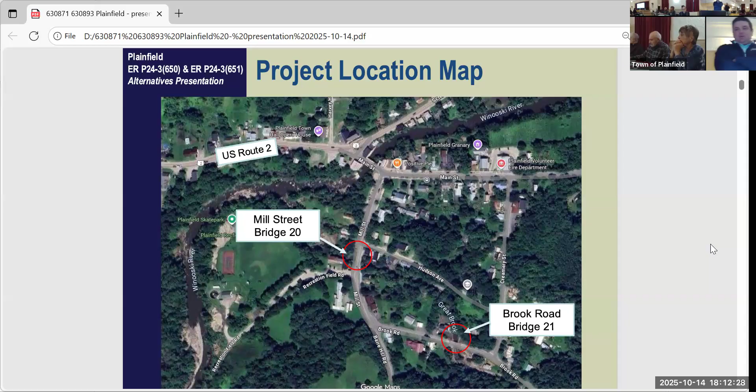Can you advance to the next slide? Again, just a project overview of the two sites. The top one is Mill Street Bridge 20, with a temporary truss bridge on stub abutments. The bottom photo shows Brook Road Bridge 21, built circa the 1920s.

Brian, just a quickie, are you not talking about the washout just a little bit up past Bridge 21 tonight? Are you talking to Cameron? Just the bridges? Okay, just the two bridges. Okay, I thought this was going to be three parts, so, okay, thank you.

Because of the use of federal monies for this project, we need to follow the VTrans Municipal Assistance Bureau flowchart. What I've provided is a general list of steps we're currently at. We're at the public meeting stage. At the conclusion of this meeting, we're hoping the town can select a superstructure, a substructure, and a traffic control methodology to advance to preliminary plans in NEPA. Following that would be potential right-of-way acquisition, permitting, then final plans, contract plans, bid phase, and construction.

Next slide, please. Some of the site challenges for both projects are the overhead utilities. They are located adjacent to both bridges, so demolition and construction will be problematic. More than likely, a temporary or permanent relocation will be required for those utilities. Also, in the village setting, we've assumed a right-of-way of 3 rods. One rod is 16.5 feet, so 3 rods is 49.5 feet. We're thinking it's more than likely you'll need some type of permanent or temporary easements if the adjacent parcels aren't owned by the town through the FEMA buyout process.

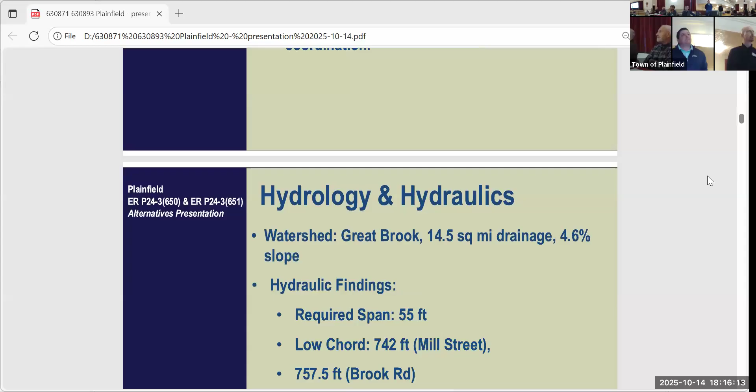Could you move to the next slide? So, hydrology and hydraulics, our D&K subconsultant, Elena Smith with Hydrus Engineering, performed this task for us. One of the first steps is determining the design storm event. For the bridge opening area, she chose a Q50, or a 2% annual exceedance probability, for the design storm event, based on the V-Trans hydraulics manual. Brook Road and Mill Street are both classified as major collectors, so based on the table, you're supposed to be designing to a Q50 storm event.

For the hydrology component, she was trying to determine how much peak flow would be going beneath both bridges. She looked at regional regression equations, coordinated with state permitting and state agencies, and also looked at stream gauge data.

Her recommendation, based on an 80% confidence level, was a flow rate of approximately 2,800 CFS through both bridges.

Once that was known, moving to hydraulics, she tried finding the required waterway opening. She is recommending a clear span of 55 feet, and based on the storm event, provided low chord elevations. Low chord being the bottom of the bridge on the underside.

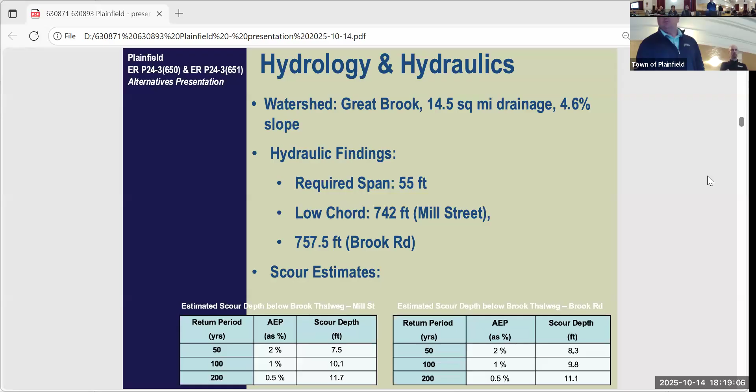Okay, so put that into perspective. If scour wasn't analyzed, a V-Trans recommendation with a hydraulics report might say putting the bottom of your structure 6 feet below the stream bed. So much deeper than a general V-Trans recommendation. And that's just where the supports are going, right? Yes.

Geotechnical. This past summer, another one of our subconsultants, GZA Geoenvironmental, conducted subsurface investigations, borings - 2 on Mill Street, 1 on Brook Road - and they were able to use boring information from a previous design consultant, limiting the amount of borings required for Brook Road.

They found that the soils consisted of fills, sand, silt, clays, some sand and gravel deposits, and for the Mill Street project, probable bedrock was 80 feet below ground surface, and for Brook Road, just slightly less than 100 feet. Their conclusions were that spread footings are suitable to bear on these soils. However, they acknowledged the scour potential for both these bridges, and mentioned that pile foundations would also be suitable.

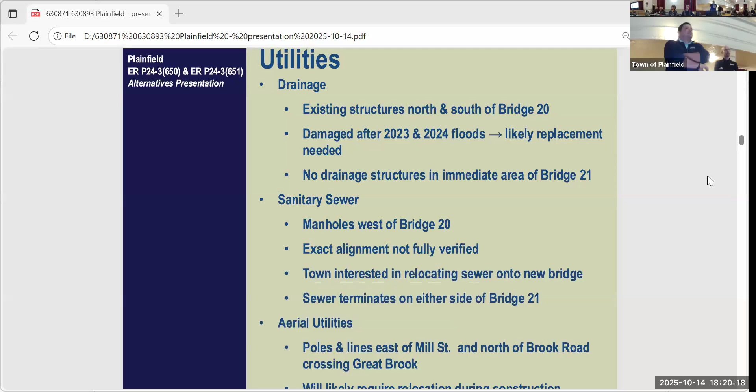Utilities. I've already mentioned aerial utilities. In general, the Brook Road Bridge has less utilities than Mill Street, so there's less coordination or impacts. On the Brook Road Bridge, besides aerial lines, I'm only aware of a water line that got damaged during the July 2024 storm event, and it's capped. For Mill Street, there are sanitary sewer, drainage, and a water line in that area that may be affected.

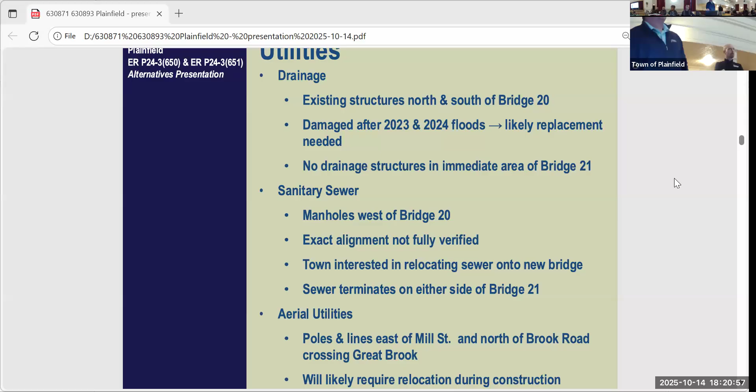This is just a regurgitation of what I said earlier about the 3-rod right-of-way and the need for potential permanent and temporary easements. Could you move on to the next slide?

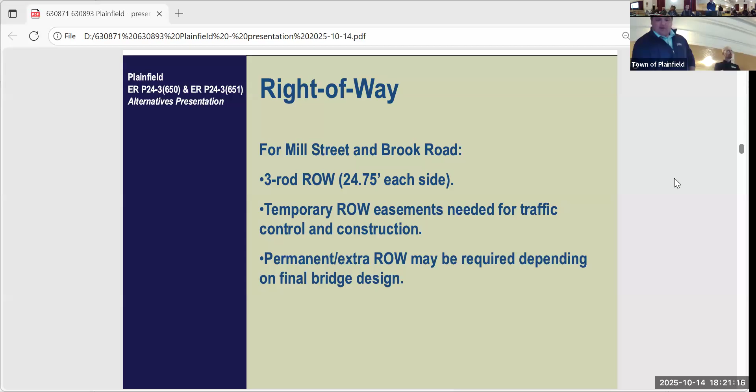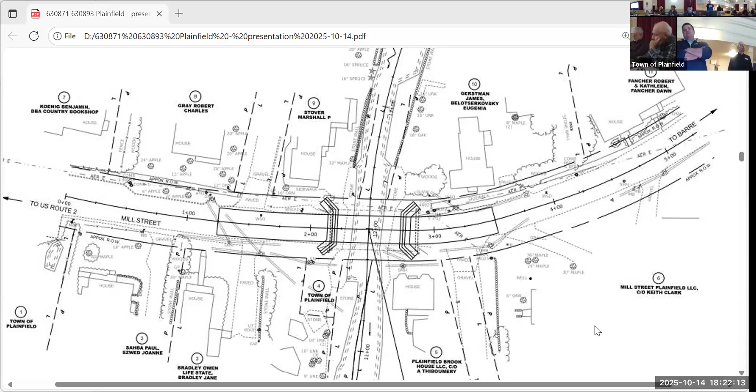Could you move to the next slide, Brook Road right-of-way plan? Again, this is showing generally the same information, with the need for potential right-of-way in the area.

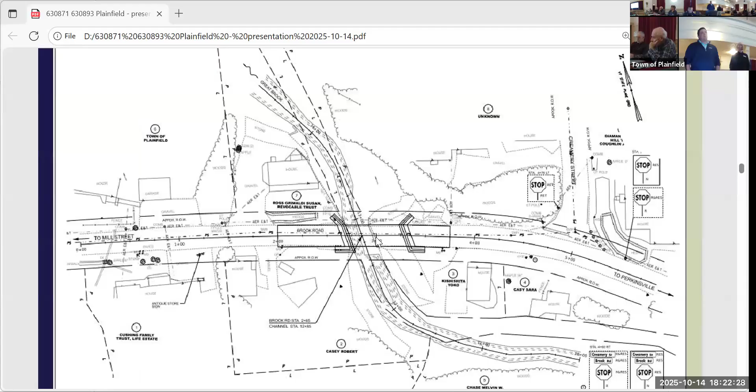Moving on to environmental resources. Because of federal monies used on this project, NEPA documentation is required - National Environmental Policy Act. It's a US law that requires federal agencies to evaluate environmental impacts whenever a federal proposed action is being implemented. For permits, we're anticipating a US Army Corps general permit, and the other one associated with a bridge is a stream alteration permit.

Also, as part of this environmental task, D&K staff visited the site this summer to identify natural resources. The conclusion was that there was no significant species - rare, threatened, or endangered species - within the project site, which is a good thing. They did document invasive species, things like Japanese knotweed, in the area.

So this is a layout plan. As the design progresses, we'll be developing more detail. For this, I just wanted to point out we're showing a 55-foot clear span on the bridge, pointing out proposed wing walls and potential roadway reconstruction limits.

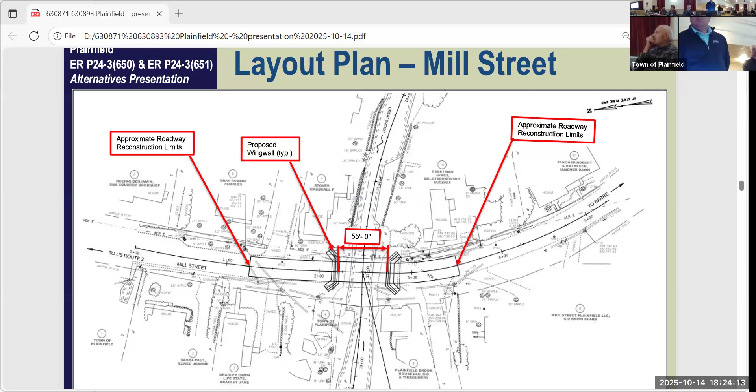Does that include the rising of the road, as you said? Yeah, if we move on to the next slide. This is a profile view of Mill Street, showing the approximate 2 to 3 foot rise in the bridge. We're currently showing shallow roadway approach slopes of 1%, 2%. I just want to mention, depending on how the project develops, if the town or property owner feels impacts to their property are too great, one option is to potentially steepen the roadway approach grades while still keeping acceptable grading. But for right now, we're just showing 1%, 2% grades, shallow, to kind of mimic what's out there currently.

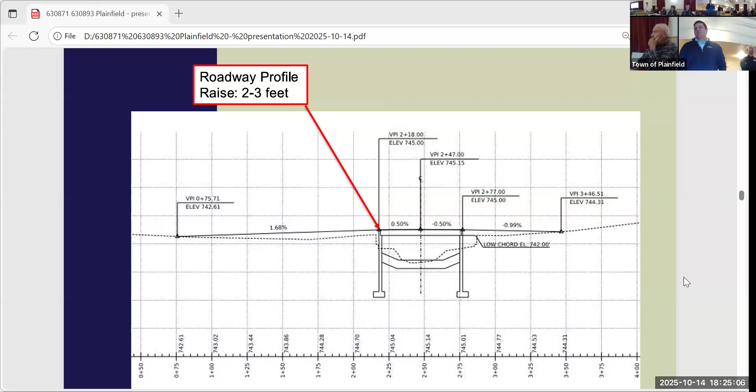Moving on to Brook Road, it's the same information I presented for Mill Street, 55-foot clear span. The one thing I might mention for this one is we are currently proposing, or thinking about, for the western abutment, keeping it in its existing location and expanding to the east. Because the western abutment ties in well with the existing rock armoring and existing concrete wall downstream. But again, as we develop, we will refine that.

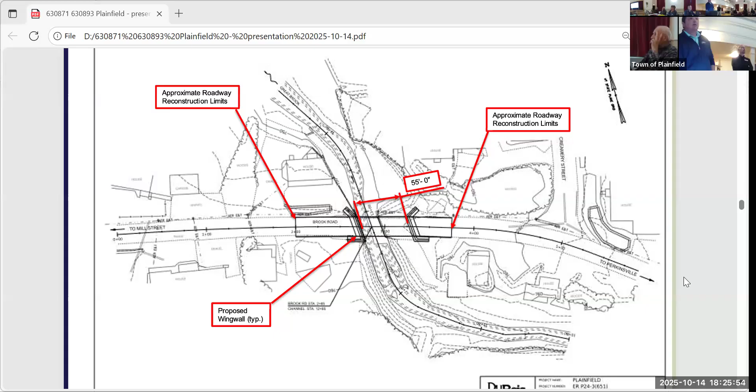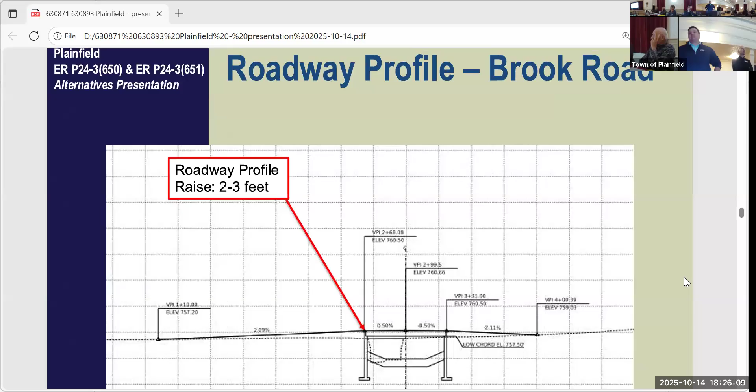Again, there's the 2 to 3 foot rise in the profile. We are currently showing tangential kink points in the roadway profile. As we progress to preliminary plans, we'll be putting in vertical curves and refining the profile. But again, we're showing a 2% downward, upward and downward approach on the roadway here, which could get steepened to 3% or 4% to limit impacts.

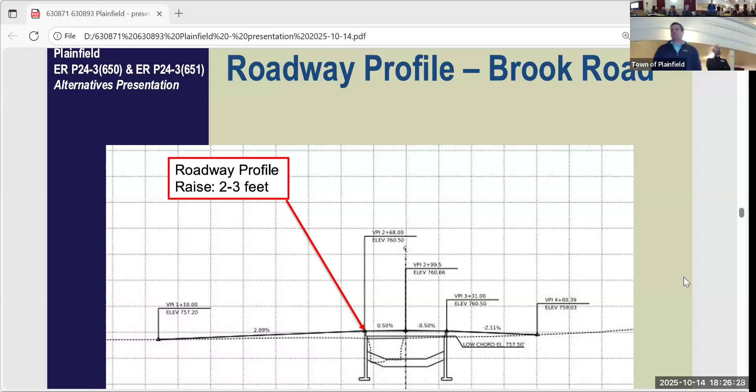So we've identified 3 areas, or 3 traffic control schemes, in which both these bridge projects could get constructed. One of them will be a permanent roadway and bridge realignment upstream or downstream of the existing bridge. Key advantages to this would be minimal disruption to existing traffic and building everything offline. Key disadvantages: I don't feel like it meets the village character to have S maneuvers in the roadway, and there would be major right-of-way acquisition for that.

A second traffic control scheme we considered was a temporary road and bridge upstream or downstream, with reconstruction of the existing bridge alignments. A major key advantage is that it allows for on-alignment construction, but one of the major key disadvantages would be that it's most costly for traffic control.

Finally, another scheme we looked at was bridge closure with a detour. Both bridges could be built on alignment. This would require the least amount of right-of-way. Does alignment mean at the same time? I mean horizontal alignment to the roadway. Oh, I see. And then it's the least costly. You don't have to maintain traffic. The issue with this though is if you close one bridge, you would have to use the other bridge as part of the detour, so it would have to be constructed sequentially.

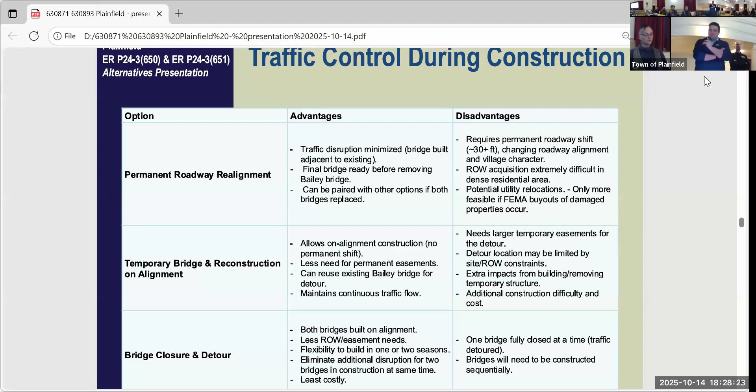Wouldn't the detour make more sense just to go up Main Street rather than Hudson, which is a dirt road? Yeah, okay, yes. It's just that everything's paved except for Hudson. I guess I didn't take that into consideration, but yes, that makes sense to me.

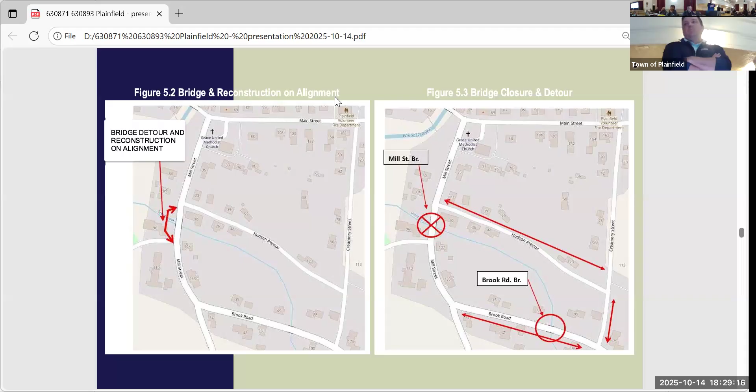And again, vice versa, swapping once one of the bridges is constructed.

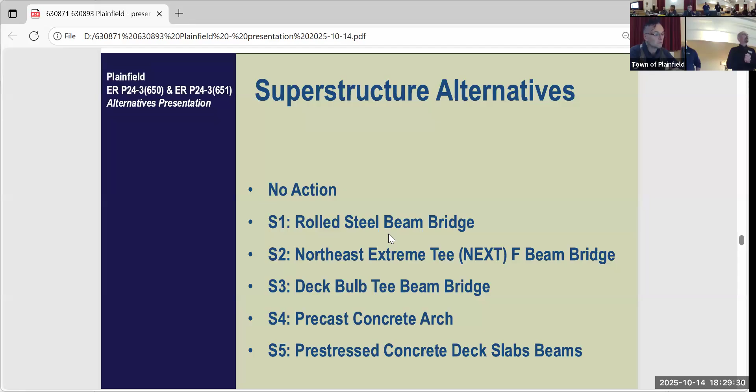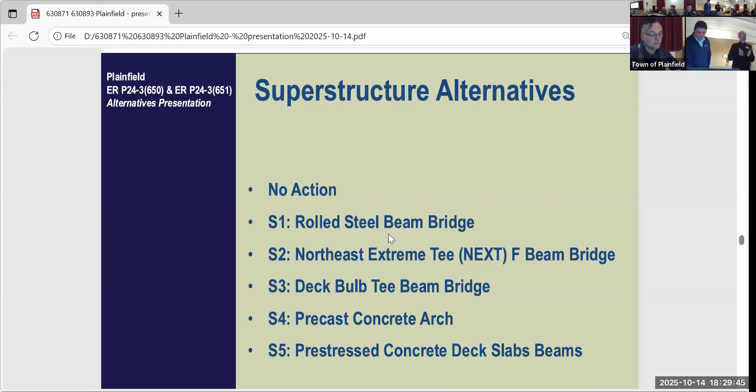Okay, next slide, Andrew? We looked at a few different superstructure alternatives just to get an idea of what was going to happen: rolled steel beams, northeast extreme T beams or double T precast concrete, deck bulb Ts, precast concrete, precast concrete arches, and precast concrete deck slab beams. I'll talk about each of those in a minute.

Rolled steel beams, the typical, historically easy to construct, contractors are generally familiar with them. Issues we might run into: typical steel corrosion over the life. Normal design life is 50 to 75 years, but you will get corrosion with exposed steel over time, regardless of corrosion protection. But that might be the simplest construction with the lightest individual beams. With that option, once you put the steel beams in over the span, you would need to do concrete formwork and cast a full depth reinforced concrete deck to work with the beams. So that'll extend the contractor's construction time a little, but that's not uncommon.

The other positive of that is, I think we designed those conceptually with about a 27-inch deep steel beam. So figure a 27-inch beam and an 8-inch concrete deck, we'd be looking at 35 inches plus or minus total structure depth. That would have to take into consideration the hydraulic opening Brian was talking about before and the raising of the roadway. So in terms of that hydraulic opening, we want to keep the beams as shallow as possible.

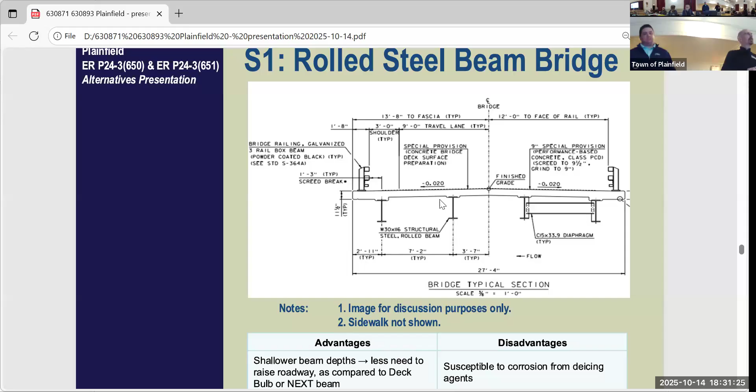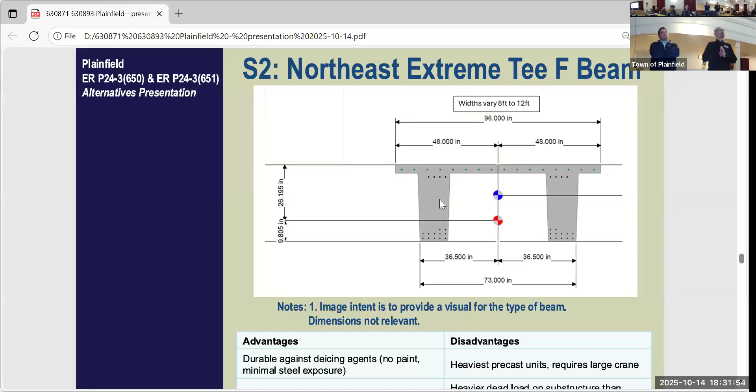Next slide. The northeast extreme T-beams, or double-T pre-stressed concrete beams, would be the heaviest option in terms of weight. Concrete in general is a nice option because you put it in there and forget it - you don't have to worry about corrosion issues as long as it's constructed correctly and you do some minor maintenance. The downside is it's generally a deeper beam because it's a standardized concrete section that they'd have at a precaster shop, so we're kind of forced into the concrete depth that we have. This would be deeper than the steel beam option.

The shallowest beams are 36-inch beams, I believe. If we went with this type of beam, which is an F designation, we would also need to install a concrete deck on top of it. So figure a 36-inch beam and a 6-inch deck - we're looking at a 42-inch deep section total. That would mean one of the higher road-raising situations. Again, like anything else, it has its positives and benefits, but as I mentioned before, this is the heaviest option.

Double-T beams are pretty wide, and you're basically getting 2 beams in one, so we'd only need maybe 3 or 4 beams side by side, depending on the roadway design required, the number of lanes, lane width, and all that. So we'd only have to put 3 beams in place, but they're extremely heavy beams, on the order of 80 to 90,000 pounds. So you'd need a 350 to 400 ton crane brought onto site. That's a consideration, like Brian mentioned before, with the Main Street Bridge - it's posted somewhat. I looked at that and it's not anything out of the ordinary, but that would have to be a consideration for something like this, because we need to bring in a big crane on site to do the lifts.

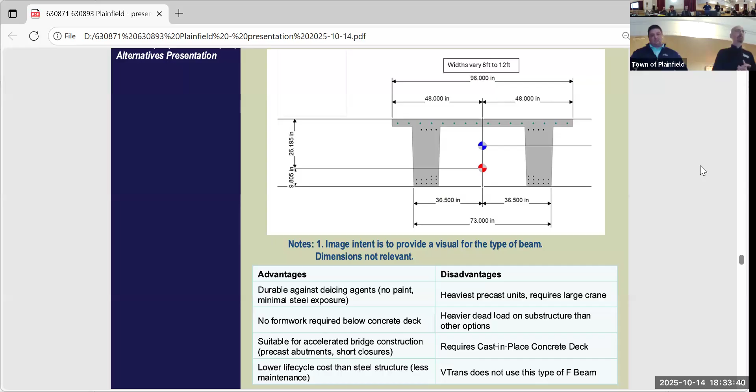The next option, next slide, talks about bulb tees. Similar - these are the same basic idea as the double-Ts, precast concrete double-T beams, about the same depth. I forget exactly which beam option we looked at, but still we're looking at somewhere between a 36-inch to a 42-inch total depth once you consider the beam itself plus the cast-in-place deck.

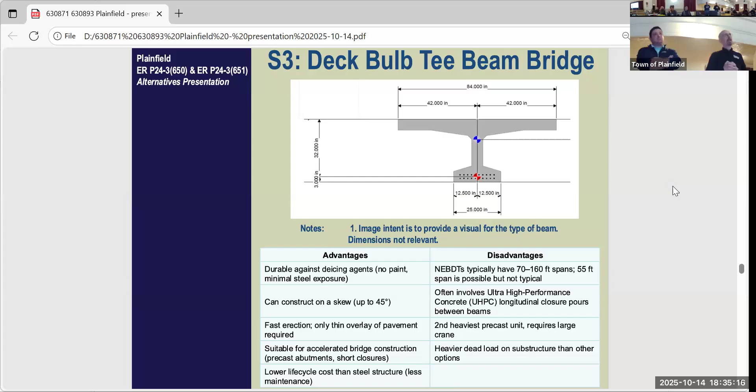The option you have to decide on when selecting either the double-T or the single-T bulb is whether the beam could have the deck already cast in place - so once you put it in place, it's ready for traffic right on top - or go slightly shallower and pour the deck in place. So if we're looking at speeding up construction, we'd want them with the deck already cast in place. There's a little bit of extra construction tolerance and closure pours in between the beams to make sure we have a nice tight side-by-side action. But those are some of the options we could look at. Again, beam weight isn't as heavy as double-T, but it's still a pretty heavy beam, definitely heavier than the steel option. So we still need to keep the required crane erection in mind.

The next option we're looking at is a precast steel arch - simple construction, relatively simple to construct. The arches can be as wide as the fabricator wants to make them, so theoretically it could be an easy erection once you put them in. The downside I see to this is the hydraulic opening question, because the arches dive down on the sides. So if we need a certain area for water to flow through, we'll have to raise up the arches to get that above the bottom of the stream. So in my opinion, this is probably not something we want to look at, but it is an option.

You said steel, and the slide says concrete. I'm sorry, theoretically we could do steel too, but we're looking at a concrete option. That would make more sense in this situation. Steel theoretically would be an option, but I don't think we want to even bother investigating that.

One other thing I want to mention is, on top of the superstructure depth, there's also the roadway fill material, and also considering driving guardrail posts potentially. So there's additional depth above the arch itself that would raise the roadway profile even further.

How much is that likely to be? Usually minimum fill at the crown of the arch is about 2 feet. So figure whatever your arch, the top of the arch goes to, then you have to go up 2 feet for dirt, and then 6 inches or whatever you need for the pavement on that.

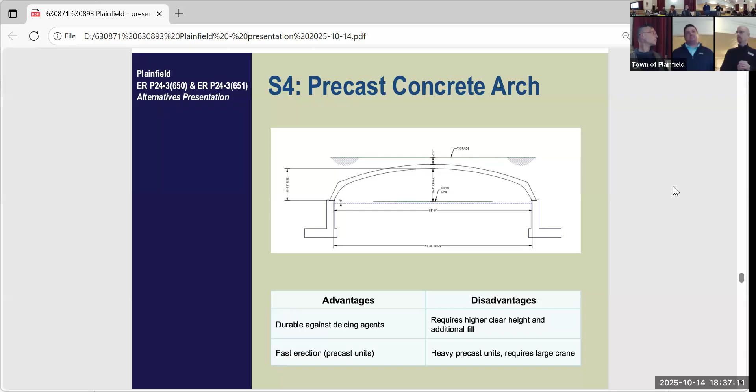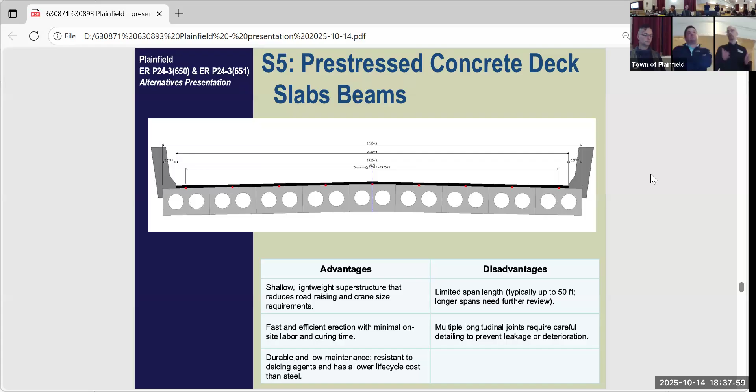The double T beams, including the deck, were something on the order of 42 inches. And slab beams, the heaviest slab you can get is 21 inches deep. That 21 inches includes the riding surface, so you don't have to do a cast-in-place deck necessarily. You can drive across the solid concrete, or you can put an asphalt overlay or a concrete overlay to get a nice smooth riding surface or something that's easy to repair in the future.

We didn't look at this initially because we were looking at stream or bridge spans on the order of 60 or 70 feet, since we were still doing preliminary hydraulic analysis. But now I think we're looking at 55 feet. Textbook-wise, 50 feet is the upper limit, but running through the calculations we did, this should work fine for 55 feet in this section.

So I think we're saying this is probably the best option. Shallower beam, lighter beam, so you need a smaller crane. It's concrete, less corrosion to worry about than you would with the steel option. This is probably the way we're going to recommend, I think.

The white circles, are those like cable holes? Are there cables running through? No, typically these are called, this is a PCI, the Precast Concrete Institute, the concrete fabricators. It's similar to the AISC, the American Institute of Steel Construction. The PCI is the precast concrete version of that. But this is their standard section.

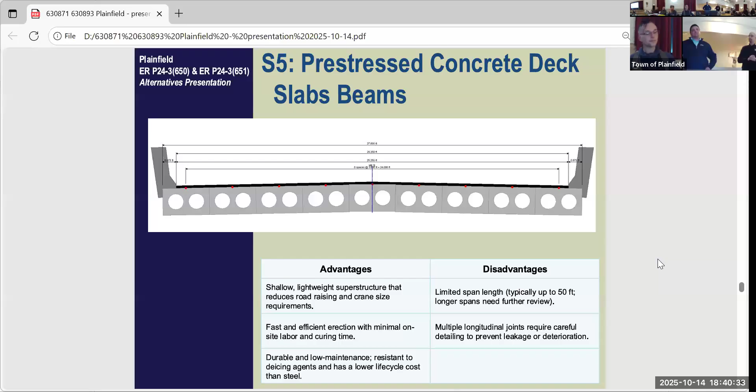Next slide. And substructures. We're looking at basically 3 options that we were throwing around and talking about. Like Brian said before, and the whole reason we're here talking is because erosion's been a problem in the past and whatnot. Soil erosion and scour is a real consideration.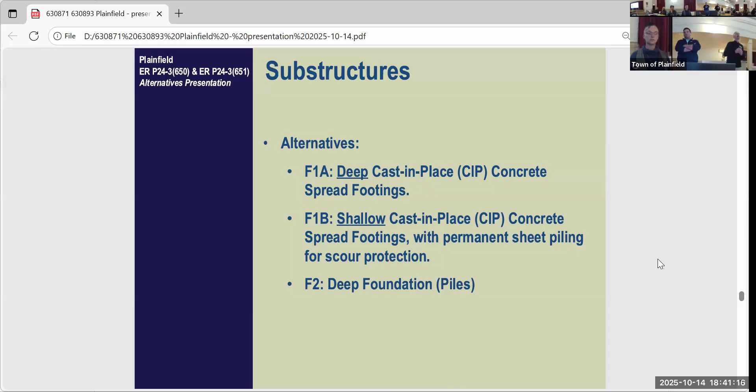So a couple of the things we were looking at was a deep cast-in-place option, shallow cast-in-place with some type of permanent sheet piling around it, or a deep pile foundation or steel H piles or something like that. I'll talk about each of these on the next slide.

So a deep cast-in-place concrete spread footing would theoretically just be a traditional reinforced concrete abutment. But the theoretical scour elevation on the stream is about 11 to 12 feet below the existing stream bed. So in order to rule out possible scour in the future damaging the bridge substructure, you would need to drop the bottom of that concrete abutment down 11-plus feet, accounting for the theoretical scour during a storm event, plus a few extra feet so the concrete still has something solid to sit on. So if we went with this option, it would be extremely tall.

One thing to mention is there would need to be a supportive excavation to get down to that depth, with sheeting, because we need to get below the existing stream bed. There's not a lot of water right now, but you have to allow for that. So the contractor would need some sort of temporary cofferdam situation, and then go down 10-plus feet, which becomes a whole workers' safety issue, because once you're 11 feet below the stream bed, all that stream bed pressure from the earth and fill is still pressing against the supportive excavation. That would have to be a pretty heavy contractor design, and just another pain in terms of construction and expense.

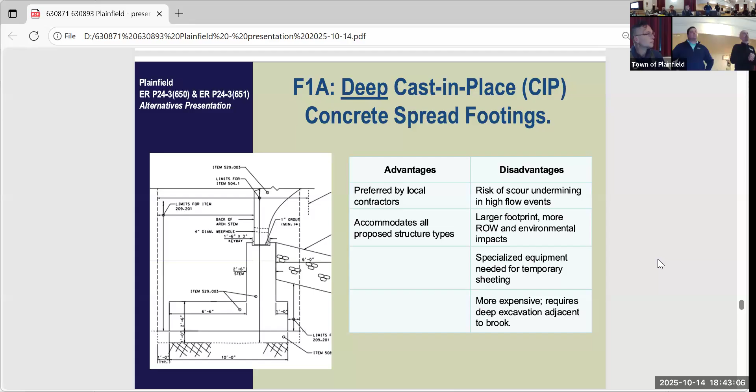Another option we're looking at is similar, still a cast-in-place footing design, but if we put some sort of permanent or left-in-place sheeting around the abutment, basically a steel box, a contractor can come in and drive it with a heavy vibratory hammer, driving steel sheeting into the ground without much excavation, getting down well below the scour depth. That rules out scour right there. It serves as scour protection for the permanent bridge, and also as supportive excavation for any groundwork the contractor has to do. So instead of going down 11 feet, they only have to go down 4 feet or whatever, since the steel sheeting is there, giving them a box to work in and put the concrete option in that way.

And that works because you're not down to the bedrock level. Basically, the geotechnical report said the in-place soil should be sufficient to handle a spread footing for a bridge this size. So theoretically, we don't need to worry about going down to the bedrock, which is greater than 80 feet, and we don't want to go that way if we don't have to.

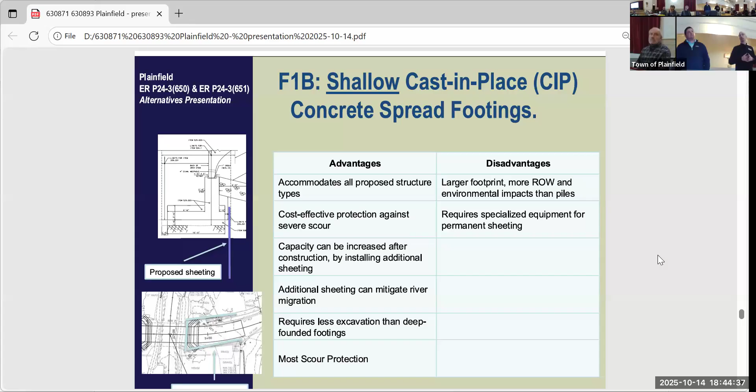The other option we were talking about is a deep foundation, a steel pile foundation, or flexible foundation, where instead of concrete resting and getting vertical support from the soils in place, you drive big, long steel down into the ground. Depending on the design, we could go to say 60 feet, relying on the friction of the sand and dirt to hold everything up, or go down to about 80 feet and hit bedrock, standing on bedrock to hold everything up. Generally it's a good option because it's a deep foundation you don't have to worry about, and it's relatively simple construction, but it's very equipment intensive, requiring big hammers to drive stuff in place. From previous work experience, it's common in places like South Jersey and New York City where you have soils like that and a lot of traffic, whereas I don't know how much contractor availability there is locally for equipment like that.

The good thing about this option, theoretically, is it handles the scour issue, where the piles are way below the scour depth. The theoretical problem is if a big storm came through and blew everything out, took out all the soil from underneath the bridge, it would theoretically still be standing, but you'd have a big void space between the steel piles that you'd have to fill back in. We could do a similar thing with the slide we saw before and use stay-in-place steel sheeting to preclude that too, but that's added work and added expense. It's a nice end product, but it's more difficult, time consuming, and expensive construction.

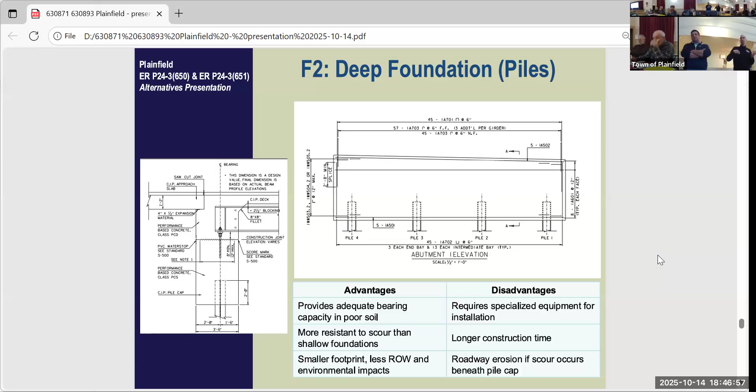So probably what we recommended in the report is the second slide we were at before, basically a shallow foundation with permanent steel sheeting left in place. And I forget what the next slide was.

Alternatives matrix. We compiled two tables based on the superstructure and substructure, identifying ways to compare them. In general, we thought the roadway reconstruction was the same, with the exception of the slab beams, because the depth of the superstructure is less, so the roadway approach limits will be less. However, the superstructure itself is probably slightly more expensive than the NEXT beams because of the amount of concrete required in comparison to the next beam.

For the shallow spread footings with permanent sheeting and the deep foundations, we thought it was very similar in cost, at $500,000 and $550,000. One of the things I wanted to point out is we're identifying costs in these tables as just comparative costs. I wanted to point out the note at the bottom that we believe anything you select is going to be construction-wise at a minimum $2 million, but could go higher in the $2 to $4 million range.

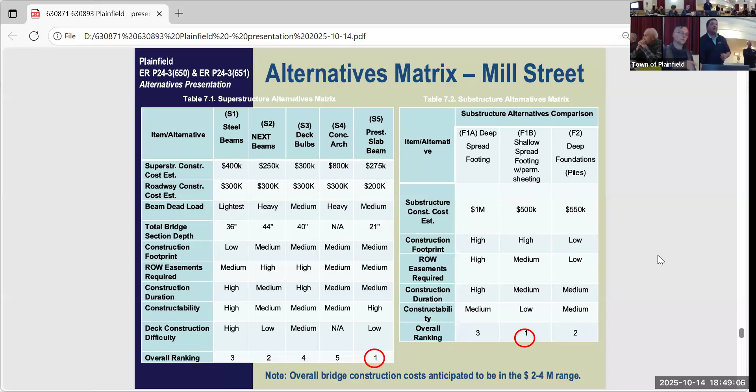So we've come up with all these rankings or criteria, and ultimately, if we move on to the next slide - the next slide is Brook Road, but it's basically the same slide, the same information.

Moving on to recommendations, we are recommending the concrete deck slab. I think the key point is it's comparably one of the lowest costs in comparison to maybe the next beam, and it has the least amount of roadway approach impacts. So that's what we're thinking about that.

For the substructure, we were leaning towards the shallow cast-in-place concrete spread footings with permanent sheet piles to prevent scour. Again, this has a similar cost to the piles, and it has more scour protection for the roadway than piles. I do want to mention, if this was a VTrans project, I think they'd automatically go with a pile foundation, and if a scour event occurs, they just sacrifice the road and let the road go. So there's no structure, there's no pre-stressed footing.

Is that what you're saying? I mean, a pile foundation is, there's the beams in the ground, and so if the scour event occurs beneath the abutment, it will get behind the road, by the abutment, and eat into the roadway. Yeah, okay.

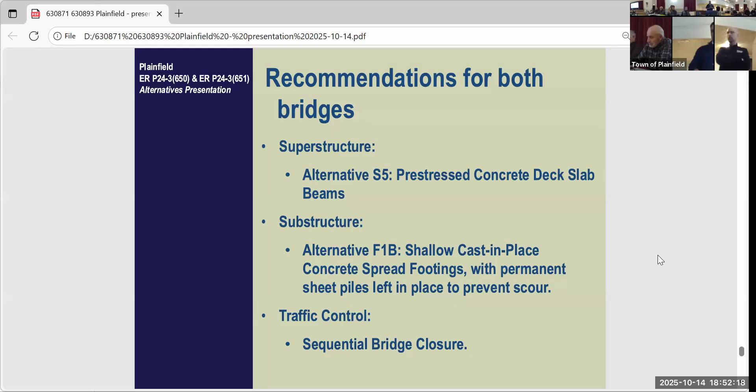Schedule. One of the requirements for this project is to get to bid phase, or authorization to bid, about one year from now, with a goal of constructing in spring of 2027.

One of the things we would do as both projects are advanced would be adding details to the plans, or directions to the contractor, about making the bridge prefabricated.

ABC, accelerated bridge construction, is a buzz term that's been floating around the past several years for projects that are on a tight schedule for budgetary reasons, funding reasons, and/or traffic reasons. It's basically getting the contractor out there to build the bridge as quickly as possible. That can mean either the entire project or just the road closure time.

But usually that would entail more precast elements than just the superstructure. Like when they bring in the beams for any project, even if they're concrete, they're considered precast, so you don't have to do anything with them on site. You just drop them in place and that's it.

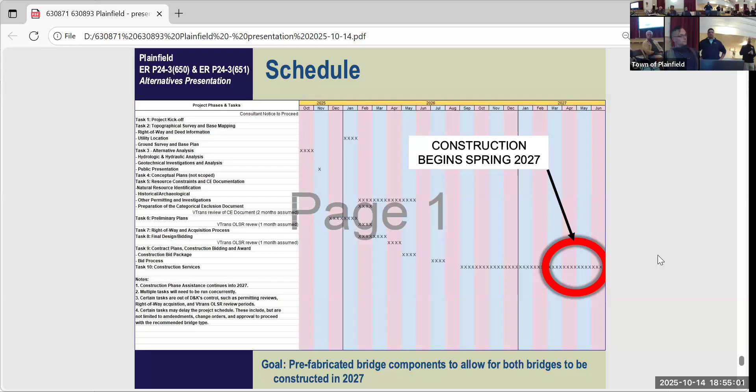I guess one final thing, I said this in the beginning and I'll say it at the end before questions and comments. I think this is the end of our presentation, minus questions and comments. I'm hoping maybe this evening, or shortly after, the town could make a decision on how to proceed and what direction you'd like us to go with.

If there are lingering questions, I'm not saying no, I guess I prefer early on. Yeah, or wait two weeks. Two weeks from today, that's two weeks from today. Questions? Go ahead, Peter.

This is all fascinating about the superstructure and the substructure and all of that stuff. What about aesthetically, what we're going to see above ground when we're done, in terms of the bridge, the walls, that we see when we go across the Main Street Bridge here? Most of the bridges in town have a similar kind of concrete wall, many with the date 1927 or something close by. Just in terms of historical aesthetics, any thought on that?